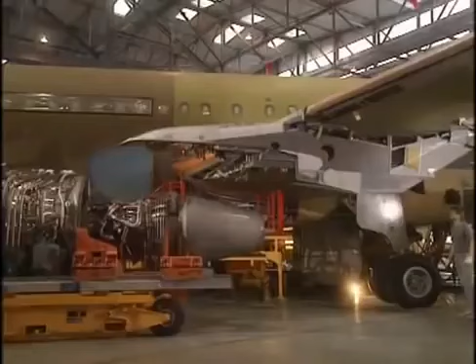The Airbus company, an international alliance of many aviation companies, came into being in the early 1970s and has grown steadily in stature until now, when most of the world's airlines fly some of the Airbus range of aircraft. There has been a design genesis that has encompassed short-haul, mid-range and long-haul solutions, and some notable variants. We investigate just how this success story has come to pass by focusing on the planes that are Airbus.

As soon as Wilbur and Orville Wright had landed and retrieved their craft at Kitty Hawk in the USA in the early part of the last century, the next questions were raised. Higher, further, faster, better. They had begun a chain of events that would change the world. There was a dramatic increase in the number and types of flying machines. Some weird, some wonderful, but all exploring ways of getting men into the air in a powered and controlled manner.

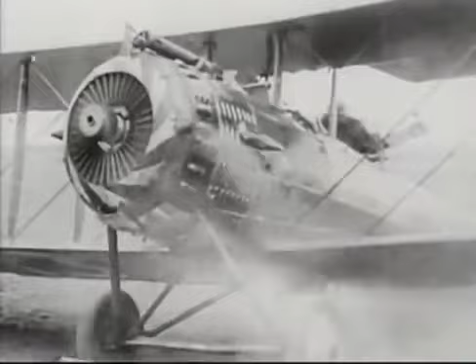Power and control were the main issues, and once the basic elements of taking off and landing had been mastered, the aspect of control became the next obstacle to aircraft development. World War I saw a rapid increase in technology as the warring nations sought to harness the advantage of powered flight. Britain, France, Germany and the USA formed their own Air Corps and produced relatively robust, efficient fighting machines. The wood, string, levers, wire and cloth had become lethal weapons in their own right.

The first transatlantic crossing in 1919 by the intrepid Englishmen Alcock and Brown in their slightly modified Vickers Vimy bomber aircraft caught the eye of the general public. Aircraft became fashionable and exhilarating fancies for those who could afford and dare to fly them, and air travel became a viable prospect.

Aircraft that could carry a reasonable number of people as well as mail began to emerge, and with them blossomed the airline industry. To travel further with more people, bigger aircraft with more engines were built. The open cockpit, wood, stick and wire, giving way to aluminium, glass and complex controls. Airline comfort and elegance reached its peak with the huge seaplanes, setting more and more records for distance and comfort, relying on the water for their takeoff and landing.

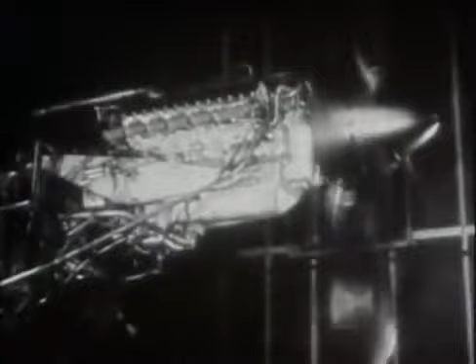Civil aviation came to a sudden halt when World War II erupted. All focus was on the production of military machines, especially fighters and bombers. It was the accelerating development of the bomber with its need to carry a large payload over a long distance that formed the basis of design work for the new era of civil passenger aviation. But the jet fighters of the Luftwaffe and the RAF ushered in a new era of flying.

Germany, France and England were almost bankrupt at the end of the conflict. Civil aviation was too much of a luxury, and European airlines initially had to make do with wartime aircraft. The manufacturing might of America had not suffered so badly, and so America was able to stake an early lead in the race to dominate the skies. Companies such as Boeing quickly used multi-engine propeller aircraft on internal flights, and the all-important transatlantic route became the key to large airline progress.

European companies concentrated on smaller routes on the continent until the arrival of the de Havilland Comet in the early 1950s, the first jet airliner in commercial service. In quick succession, the aircraft companies of Britain, France, Germany and Europe began building short-haul jets that proved economical, comfortable, reliable and efficient.

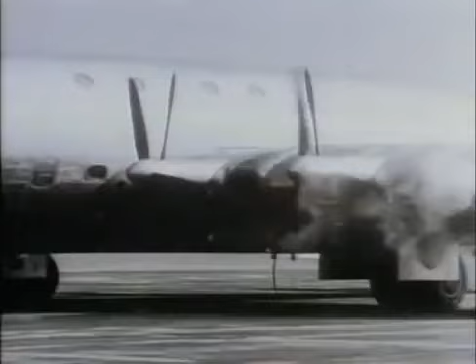Britain and France had been building their own aircraft types for some time. The BAC 111 was a typical British design. The unusual Hawker Siddeley Trident trijet and the sleek French Caravelle enjoyed some success with small European airlines and provided excellent jet airliner experience. But people were beginning to want to travel further, and it was the long-haul expansion that was evident, and that belonged almost solely to the Americans.

In the mid-1960s, the EEC slowly came into being as European nation after nation signed up to the common market. The British and French governments recognized that working together could give better results, pooling ideas, technology and expertise towards a common goal. Instead of trying to go bigger than the Americans, then why not go faster across the Atlantic? Enter Concorde, the world's first supersonic airliner. The Anglo-French creation was a technological masterpiece. Flying east to west across the Atlantic, you could actually land in New York 1 hour before you set off.

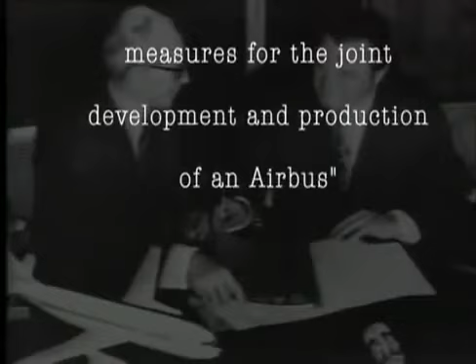In 1967, French, German and British governments announced plans to build a European aircraft. The aim was also to challenge the Americans. However, a combination of politics, the economic legacy of Concorde, and the costly TSR-2 fiasco meant that 18 months later, the British government withdrew support.

Hawker-Siddeley Aviation rather bravely funded the building and design of the wings themselves for the new Airbus, until the company was merged with BAC to become part of British Aerospace in 1977.

At the Paris Air Show in May 1969, the A300B, the world's first twin-engine wide-body jet, is launched. It is to carry up to 250 passengers in a comfortable two-class layout, and later that year, Airbus secures its first potential order for 6 A300B2s, with a letter of intent from Air France.

December of the same year saw the Airbus Industrie GIE officially formed between Aerospatiale for France and a grouping of Germany's leading aircraft and manufacturing firms, later part of Deutsche Aerospace, with VFW Fokker of Holland and Hawker-Siddeley of Britain becoming associate partners.

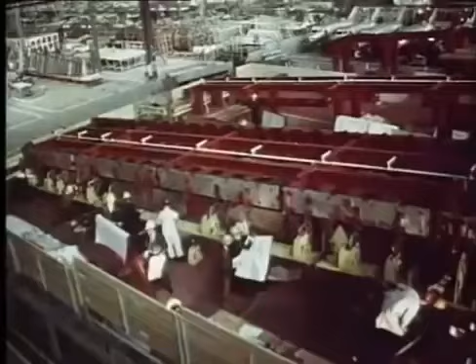Airbus Industrie was to provide a single sales, marketing and support network for Airbus customers. For the first time, not only was a brand new aircraft about to be produced, a brand new company and business concept too was to emerge, spanning many nations, languages, customs and expertise.

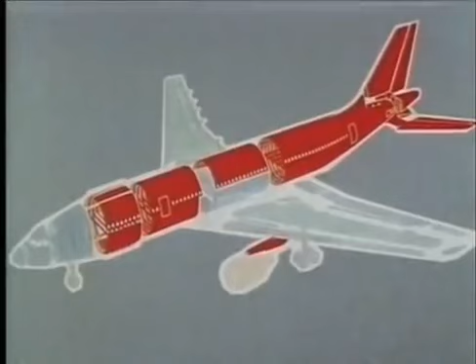The allocation of building sections of the aircraft was closely scrutinised and based on existing skills in national companies. Deutsche Airbus near Hamburg had responsibility for the main fuselage. Hawker Siddeley in Britain began work on the wings. Aerospatiale in France were the main assembly point in Toulouse, with the cockpit and centre section being produced at Saint-Nazaire. A few years later, the Spanish company CASA would come on board to build the tailplanes in Madrid.

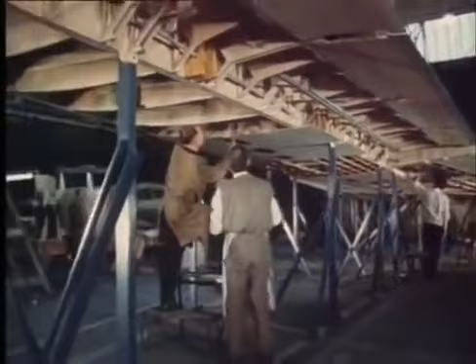In the late 60s and 70s, it must be remembered that there was not the technology available to today's designers. Wooden mock-ups were still made of the wings by Hawker Siddeley. Computer simulation, or CAD, was still a dream. Feet and inches, pounds and stones still vied with millimetres, kilograms and kilometres.

Today, a designer can email or video conference immediately with a colleague in Toulouse or Holland. Information, queries and ideas can be shared instantaneously via the internet. Back in the late 60s and 70s, the slide rule was king, and the experience gained from the early jets and Concorde production became invaluable.

Testing was generally done to destruction to ascertain stress capabilities, even simulating a bird strike using a special air cannon. And as none of the companies had successfully produced a wide-body jet airliner before, the risks were enormous.

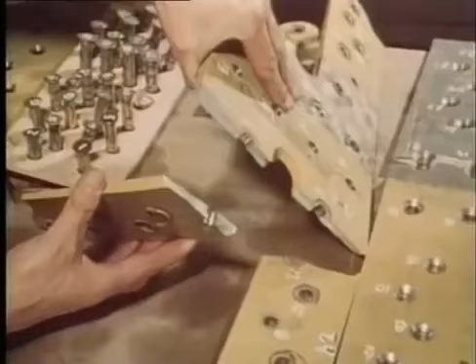It wasn't just the technology that was needed to make this project happen. The people and expertise, both on the technical and management side, were equally as important. To successfully combine the skills, ideas, fears and strengths of several nations, companies required great tact, diplomacy and clarity of vision.

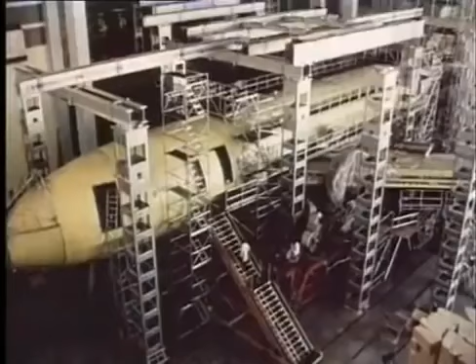In a series of groundbreaking moves with parallel moments of uncertainty and optimism, the first A300 began to take shape. It was the first wide-body jet of its type ever, and the first airliner ever to be built by several nations at once.

Immediately, there were difficulties. The first choice engine, the Rolls-Royce RB211, was dropped after Rolls sold the design to the American TriStar jet and lost interest in the Airbus project. In a remarkable yet pragmatic turnaround, Airbus arranged to test the American-built General Electric CF6 engine on a B-52, found it to be remarkably fuel-efficient and powerful, and incorporated it into the design.

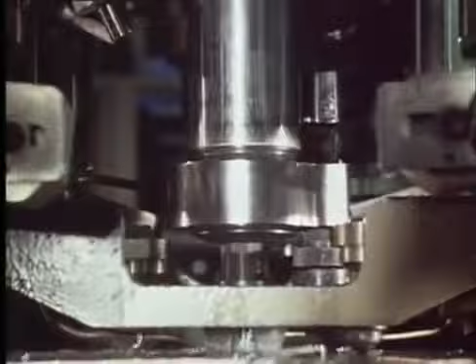The engines were further tested at extreme temperatures and conditions designed to highlight any possible flaws. The spirit of cooperation and dedication to the cause pushed Hawker Siddeley to introduce expensive new digital tooling machines, crude by today's standards, but at the time revolutionary and symbolic of the highly technical and energetic approach to the project. Wings were built in vertical jigs, with the leading and trailing edges fitted separately.

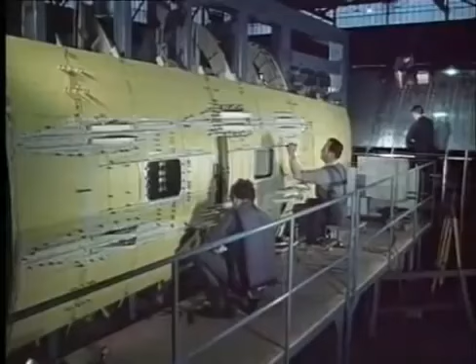Airbus pioneered the use of advanced composite materials on the A300B, and CASA in Spain began incorporating them in secondary structures such as tail fins and leading edges. Deutsche Airbus produced the central fuselage in huge jigs, again with little computerized technology, a testament to the skill and engineering expertise of all involved. A full sense of European cooperation was beginning to emerge, and there was a certain pride in being part of a new special international community.

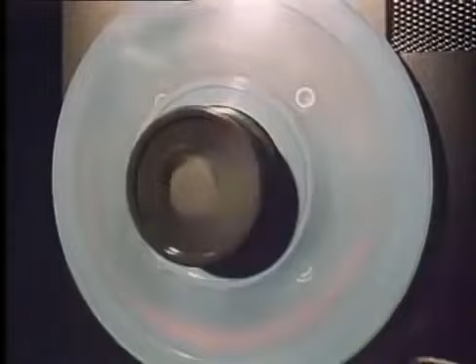The sites were widespread. Hawker in Chester, England, Deutsche Airbus in Hamburg, Germany, Aerospatiale in Saint-Nazaire, northwestern France and Nantes, and of course the final Airbus assembly plant in Toulouse, southwestern France.

Designing the separate sections and building them was one thing. Getting them to Toulouse for the final assembly was another. With their first aircraft in several pieces and a letter of intent from Air France for 6 A300B2s, there was no time to spare. Obviously, air transport was needed to carry the sections to and from the various sites, and initial procurement made, but no one could wait for an aerial transporter to be built or adapted. So road transport and ferries were used.

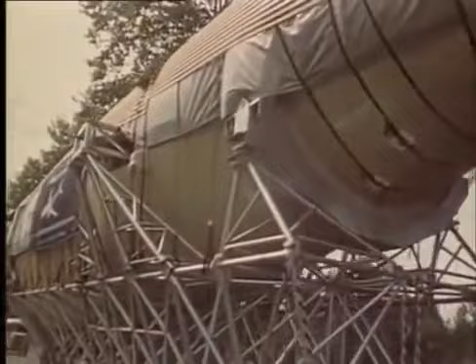The huge loads caused a lot of excitement and chaos on the road, as phone lines, power lines and trees were always an obstacle. But the sections had to get through to the plant for assembly. Many people watching the spectacle did not comprehend that they were seeing the unification of a pan-European project, as the huge loads gently nudged their way through villages and towns day and night. This is still the case even today on routes to and from the airports.

Conscious of the need for speed in 1972, and again with remarkable boldness, to improve the transportation process, Airbus bought and modified an American Boeing Stratocruiser, followed quickly by 3 more. In 1972, these 4 Super Guppies began commuting between the Airbus plants. The transporters were powered by 4 Allison 501 propeller turbines, derived from the Boeing model B377 and also used in the NASA spaceflight programs.

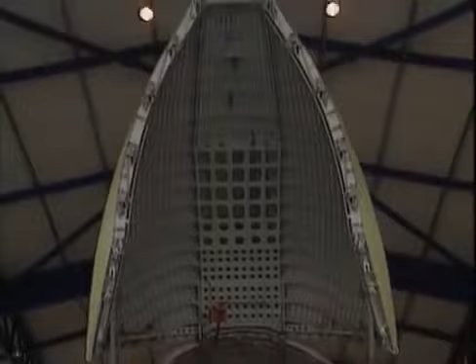As Airbus Industrie grew with rising production rates, the Guppies eventually arrived at the limit of their capacity and age. So, Deutsche Airbus and Aerospatiale formed a Special Aircraft Transport International Company, SATIC, in October 1991, and began to develop one of their own aircraft to become the new supertransporter. This arcane but practical transportation got the parts of the first Airbus A300 to the Toulouse plant, and work began on assembling them immediately.

1972 was a busy year for Airbus on many fronts. True to its original concept, Airbus Industrie was not just building aircraft, it was selling them too. Mock-ups of the interiors were made to show prospective customers what could be done with this wide-bodied airliner. Training of pilots began in earnest with the A300 simulator, setting in motion the practice of allowing pilots to cross-train from type to type with less difficulty and introducing the early concept of commonality.

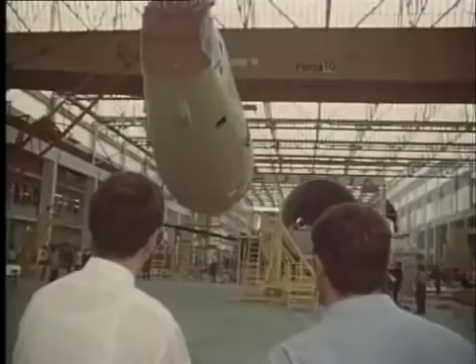A short time after assembly began, Air France officially became Airbus's first customer, placing a firm order for 6 A300B2s, a 270-seat stretch version of the original A300B they originally requested. This order was followed sometime later by Spain's Iberia Airlines. In January 1972, the Spanish company CASA is officially awarded the contract to build the horizontal tail parts of the aircraft and joins the consortium, taking a 4.2% stake and developing the use of weight-saving new composite materials.

As production of the A300 continued apace, the A300B4, a longer-range version of the A300, was launched, with a range of 3,000 nautical miles compared to the 1,200 nautical miles of the original A300. Its maximum takeoff weight at 165 tons is also greater than that of the A300B2. As well as the introduction of the composite sections of the aircraft's fin, leading and trailing edges and radome, the A300 also featured advanced rear-loaded aerofoil, giving a greater aerodynamic efficiency of the wing, and full flight regime auto-throttle and automatic wind shear protection, putting it well ahead of its competitors.

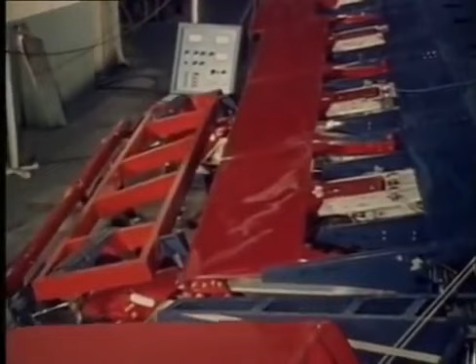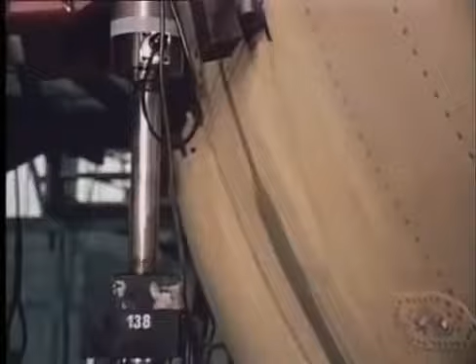The rollout was performed jointly with the appearance of Concorde Mark II. A300 was the airline industry's first twin-engine wide-bodied aircraft, and it soon began to be noticed. Detailed testing of all areas followed. The cabin resistance to air pressure was calibrated. Foam blocks were used to reduce the volume of interior space, so less air is needed and a more accurate result obtained. In these pre-computer design days, hydraulic rams were used to simulate and exceed the stresses that could be imposed upon the airframe. Early punch code computers recorded the data.

The A300's maiden flight took place on October the 28th, a month ahead of schedule, despite several delays due to bad weather. The flight crew of Captain Max Fischl, Bernard Ziegler, Gunther Scherer, Pierre Canel and Romeo Zinzoni nervously began pre-flight checks. The A300, the first Airbus aircraft and first wide-body twin-engine jetliner, took off at 10:30 a.m. local time from Toulouse Airport for a mission lasting for 1 hour and 23 minutes. A thorough in-flight check of all systems was undertaken, both on board the aircraft and from the supporting teams.

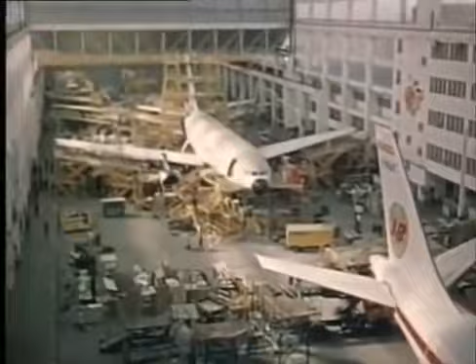Landing was greeted with relief and exhilaration. The flight crew were delighted with the aircraft's performance. Much of 1973 was given over to flight testing and evaluation, and the production line began to expand. In March 1974, the A300B2 received certification from French and German aviation authorities, ahead of schedule and on budget, which meant it could be delivered to its new owners.

Air France took delivery on the 10th of May, entering the A300B2 into service on the 23rd by flying from Paris to London. The aircraft now began a whistle-stop sales tour of the world's possible clients, landing and taking off at major airports and air shows around the globe, especially North and South America. Nothing sells an aircraft like the aircraft itself, and the orders start to roll in as the Airbus story accelerates.

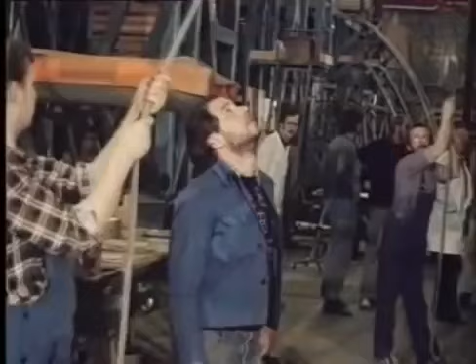As the product range was developing, taking on board new technical innovations and adapting to more markets and customer demand, so the company itself was developing. The British air industry in the late 1970s underwent a major shake-up, and after several mergers and acquisitions, including the takeover of Hawker Siddeley, British Aerospace was formed and joined Airbus Industrie in 1979 as a full partner, taking a 20% share, raising the profile and capability of the European venture and firmly uniting Europe's leading aircraft manufacturers. Just prior to this, the smaller but longer-range A310 was launched, with even more technological advances. With the A300-600 and A310, Airbus first develops the concept of commonality.

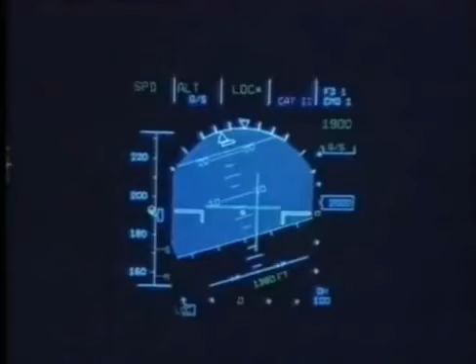This meant that for the first time, a twin-aisle aircraft could be piloted by a two-man crew, using instruments located in front and above, without the need for a third crew member, usually referred to as the flight engineer. The introduction of cathode ray tubes, or CRTs, was also a revolutionary innovation. The old dials and needles were soon to become a thing of the past. Airlines around the world began placing orders for this aircraft, from Saudi Arabia to American Airlines. Airbus established its presence worldwide and as a world leader.

The aircraft industry has its own idiosyncrasies. Large freight carriers such as FedEx, UPS, DHL, TNT and others were looking for a freighter, and they selected the 222-inch fuselage cross-section for the original A300B jetliner. This sizing not only created one of the most comfortable passenger cabins ever designed, it also provided spacious lower deck holds, capable of accommodating the industry-standard LD3 containers side by side, or standard pallets, as well as a voluminous main deck with excellent cargo capacity.

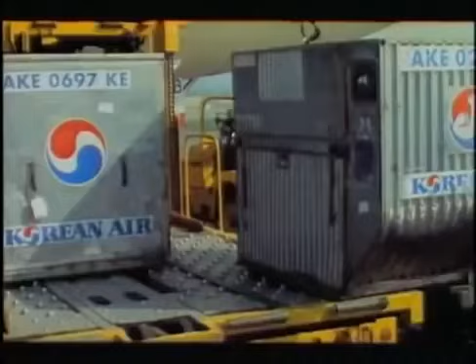An A300B4 configured as a freighter has a 43 metric ton cargo capacity at a range of over 2,000 nautical miles, 3,700 kilometers. And 1978 sees the launch of the convertible A300B4 passenger cargo aircraft, aimed at the developing Middle and Far Eastern countries. These additional markets were to prove useful to Airbus Industrie as the passenger markets fluctuated in their buying cycles.

The A310, seating 218 passengers, aims to offer airlines a smaller, longer-range alternative to the A300. Its launch shows Airbus to be more than a one-aircraft manufacturer. The commonality factor means that essential parts, sections, procedures and training can be shared by aircrew and ground crew, not only saving on initial cost, but also increasing enormously the after-sales support and service offered by the company in all parts of the world. Airbus again went up a gear in the eyes of the world's major airlines.

In 1981, the first A310-200 rolls off the final assembly line in Toulouse, almost 10 years after the rollout of the first Airbus aircraft, the A300B. Only 6 computers are needed to run the aircraft's autopilot, autothrust and flight director, as opposed to the 18 computers required on the A300B2 and A300B4, which used analog technology.

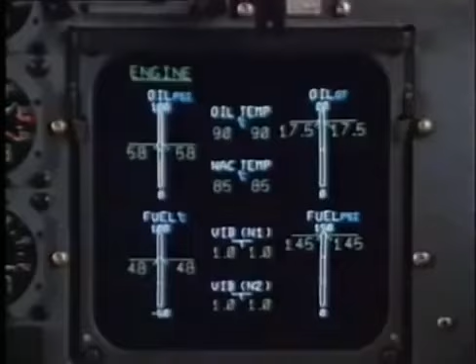The A310-200 entered service with Swissair in April 1983, and almost immediately the go-ahead is given for the A310-300, which again incorporated new innovations, such as using composites in primary structures like the fin, and becoming the first civil aircraft to feature the drag-reducing wingtip extensions.

Within the family structure, the longer-range A300-600R has been developed, giving longer range and aimed at a definite market, the Americans. From the early, heady days of optimistic dreams and challenging political and technical reality, the team at Airbus has ushered in a new era of aircraft, broken into new and bigger markets, and proved themselves capable of taking their place at the leading edge of aircraft design, manufacture, production and delivery. And the story is only just beginning.

Having begun to establish itself as a world player, Airbus looked at the medium-haul range in different areas of the world. And to replace the aging global fleet of existing aircraft, they set about designing the A320 family of twin-engined, single-aisle jets.

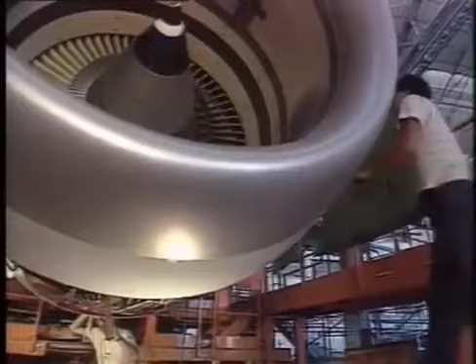In Toulouse 1986, the A320 began to take shape, the parts, as before, arriving from different European countries. CASA in Spain increasing the use of composites in the tail section. The engines chosen for this smaller jet were the SNECMA GE CFM56 turbofan and International Aero Engines V2500. Section by section, the plane was assembled and tested on the ground. Resting on its own undercarriage is just one of the major steps for a new airliner.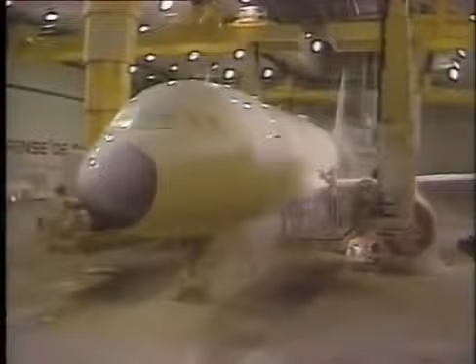Prior to painting or public rollout and first flight, the aircraft is fitted with engines of the same weight to aid structural testing. These will be changed for the CFM56s later in December of this year. The maiden flight takes place early next year, February 1987. Europe's Airbus 320, the third airliner of the range so far, is about to take to the skies for the first time.

Past success with the A300 and 310 aircraft, and Airbus's reputation, mean that orders for the new jet are already accumulating. The highest ever figure of orders placed, 600 so far, before the aircraft completes its commercial certification program. Happily, the maiden flight is completed without any major problems, and certification and marketing begin. The earlier work on the A300 testbed accelerates the testing, as does the use of advanced technology on the ground and the air to process results.

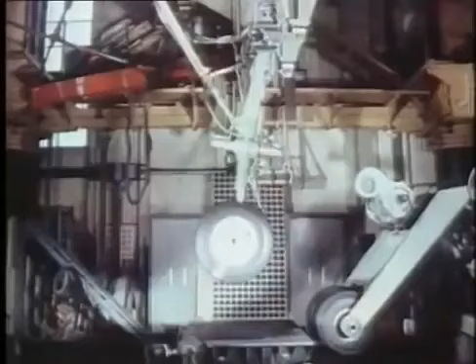One of the more dramatic tests involves the skid rail and rear fuselage testing, as well as repeat heavy landings and takeoffs with the undercarriage. Even the earlier air cannon is used to simulate bird strikes against the windshield, and the engines also undergo stringent testing with foreign objects.

One important aspect of the A320 testing involves monitoring the crew for stress and behaviour patterns with the new technologies. All these and more tests are thoroughly applied, and finally the aircraft receives its certification.

Rollout of a new aircraft is a very prestigious affair, akin to the launching of the great ocean liners of the past, especially when Airbus is the symbol of European cooperation and technical expertise. Dignitaries from all over Europe and the world's media welcomed the dramatic rollout of the A320.

With the order books filling up and airlines from many nations taking up the short to medium haul aircraft, production went into top gear. The various companies from around Europe producing the respective parts, transporting them with the supertransporter and assembling them in Toulouse. The technical innovations of this aircraft allowed it to be flown easily and efficiently on many routes, expanding air travel even further.

Production of the A320 rose to 10 aircraft per month as the world's airlines began to exploit the emerging short-haul market, competing directly with road and rail transport. Once the air industry's underdog, the fortunes of Airbus were improving dramatically. The A320 was the first civilian airliner to introduce fly-by-wire technology, a massive step forward in control and safety in the air.

In the early years of flight, sheer muscle power was all that was needed to operate the stick that controlled the aircraft surfaces. As aircraft grew larger, the control surfaces became bigger, and forces generated were too great for mere muscle. Some ingenious designs were incorporated to help this. One of the earliest steps to assisted flight control was with the flying boats. The wheels and pulleys involved became quite common in many aircraft of the time to deal with the sheer muscle power needed to maneuver these craft.

Some seaplanes began to use electrical servo assistance for the control surfaces. With bigger aircraft and the civil aviation expansion in the 1950s, more control was needed. The Princess used electric servos to operate the different surfaces. Without these, she would not be capable of maintaining any flight stability or control. Soon, nearly all aircraft were using servos of one kind or another to operate the flaps, rudders and tail areas. These surfaces were, however, still linked to a complicated matrix of mechanical levers, rods and hydraulic motors activated by electrical signals.

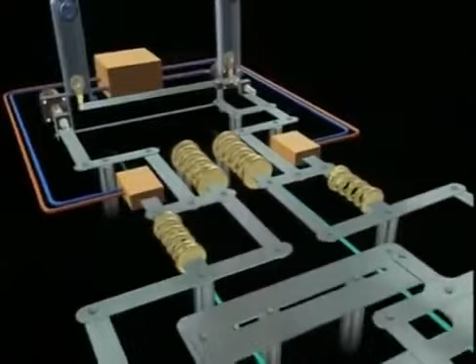The next logical step was to link the motors that moved the control surfaces to the cockpit by electrical wire. This was much simpler, lighter and safer. This also meant that the traditional columns or control yokes could be replaced by smaller side sticks. This revolutionary leap forward, along with the new display systems and forward-facing cabin, made the A320 the most technologically advanced airliner of its time. I love flying fly-by-wire aeroplanes. William Wainwright, chief test pilot at the time for Airbus, takes us through some of the features of fly-by-wire.

Now we have electric signalling. I'm back to my small side stick, which I move with my fingertips, just like that. That moves the aeroplane. To illustrate what I mean about going to maximum performance easily, let's just slow down to our so-called alpha max, which is just before the stall. First of all, I need to reduce the engine thrust. Then the aeroplane slows down, but still with quite light forces.

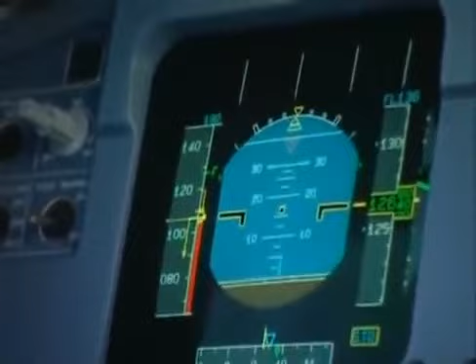I pull the stick fully back, and I keep pulling it back. There we are. It's going back towards 100 knots. And all I'm doing is holding the stick fully back, and the aeroplane will stabilize just above the stall. Feel it's buffeting a little bit. That shows that we're not very far away from the stall, but we won't stall. We can sit there all day.

Safety is obviously of paramount importance, and in order to ensure that there are no technical failures with these systems, 5 separate computers are used in the control system, each individually capable of assisting the pilot, and to provide even greater redundancy insurance, each computer is comprised of 2 units, one monitoring the other. To provide an additional level of security, the computers are designed and built by different manufacturers and programmed by different software teams, so that any unforeseen technical faults will not affect all the computers on board.

They also have a direct benefit to the human element of flight. They help me by making the aeroplane much more pleasant to fly. They smooth out all the nasty characteristics that some aeroplanes have, like big trim changes with speed or weight, changes in pitching moments with applications of thrust. That can all be taken out by these computers.

The computer systems also introduce the benefits of commonality in the Airbus family, making the aircraft very similar to fly. There are also several benefits to airline companies with this kind of technology. This commonality of flight systems was also applied to the airframe, and the adaptability of the A320 is evident in later models.

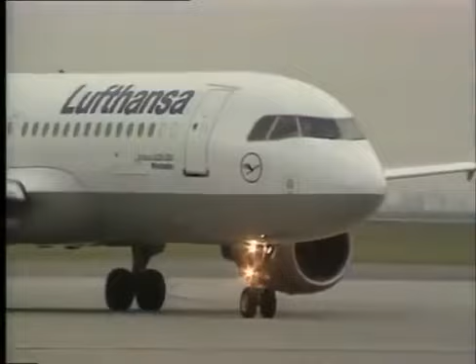The A320 was the first single-aisle airliner to feature a wide fuselage, offering more comfort to passengers in the cabin, with wider seats and a wider aisle. Furthermore, the superior cabin size and shape allowed large overhead storage to be fitted for faster boarding and deplaning, as well as greater convenience. The A321 seats 185 passengers and has a range of just under 4,500 kilometers.

It was launched in November 1989 and flew for the first time in Hamburg in March 1993, where it is to be manufactured. Longer and carrying more passengers farther, the A321 was ideally suited to the medium haul runs, both in Europe and the USA. Because it also uses the same cockpit, flight systems, engine and cabin as the established A320, airlines also receive better parts and backup service.

May 1993 also saw Airbus launch another member of the A320 family, the A319, a smaller version of the A320, seating 124 passengers. Again, sharing commonality with the A320 and A321 enabled all 3 aircraft to be operated effectively as a single type, leading to significant savings for airlines. Further savings are obtained through cross-crew qualifications with the A330 and A340.

The Airbus family and production capacity continued to grow. And on August 25, 1995, as it completes its successful maiden flight, only one day after its rollout, Airbus announces that it has firm advance orders for 81 A319s, orders for 905 aircraft from 43 customers for the A319, 320 and 321 family.

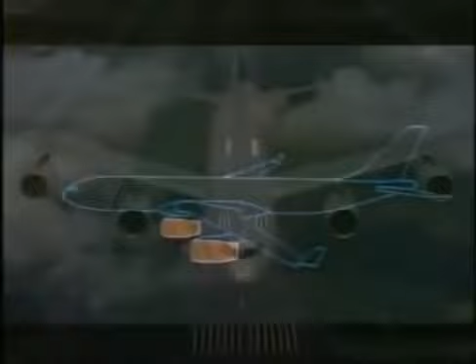The new family of A330s and A340s were aimed at the medium to long haul and also the very long haul market. The common use of fuselage, cockpit and main wing meant that Airbus could cut development costs and time. Customers could also achieve greater reliability, efficiency and service. Savings were made in spares, training and maintenance, as well as operating costs.

The main difference between the types was based on the number of engines, and at the time of launching these models, much technical research was conducted to achieve maximum efficiency in this market, explained here by one of the early design engineers.

We'll start with a common airframe featuring a twin-aisle fuselage seating 300 passengers and dimensionally identical wings and tail surfaces. And we'll look at the three configurations currently offered to airlines: the twin, the quad, and the tri-jet. Extra weight at the back there, both due to the engine itself and the need to strengthen the rear fuselage to carry it. So to redress the balance, the wing must be placed further aft.

Now, the length of the moment arm and the dimensions of the tail surfaces are directly linked. If the moment arm is shortened, it'll reduce the tail's efficiency. To compensate, we need either bigger, draggier tail surfaces or a complex full-time longitudinal stability augmentation system. So Airbus concentrated on two designs, the twin-engined wide-body A330 and the four-engined wide-body A340.

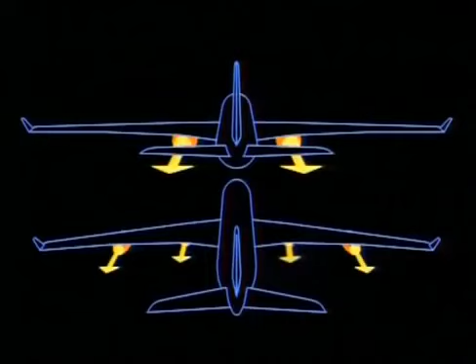If four engines are reduced to two, the two will need to be larger, much larger in the case of the twin designed for very long ranges. Why? Because the extremely heavy load carried calls not only for high power, but for very high reserve power to meet the single engine out requirement. In a twin, an engine failure results in a 50% power loss. And for the long-range twin, this must be offset by very high thrust indeed, on one side only.

The quad is much less affected, with one engine representing only 25% of the installed thrust, and the reserve power is more evenly distributed. The imbalance that both aircraft now suffer must be compensated for by the rudder. The long-range twin rudder has a much more demanding task and must be made bigger, and the consequence? Higher drag in the cruise.

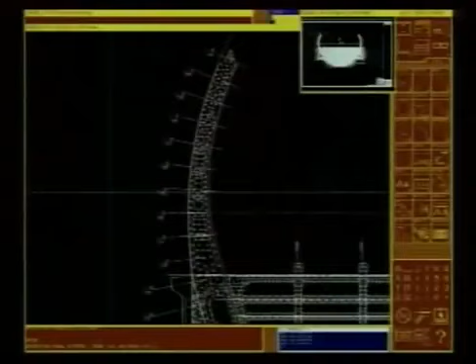Research and development to match potential customer requirements was begun as early as 1987. And as a testament to Airbus's information flow, input was also included from airlines' own representatives. The increasing use of better computer design systems and electronic communications built on the earlier technological advances and helped enormously in decreasing testing time and refining production methods. The very early methods of wooden mock-ups, cabin interior construction and expensive wind tunnel tests began to look very dated.

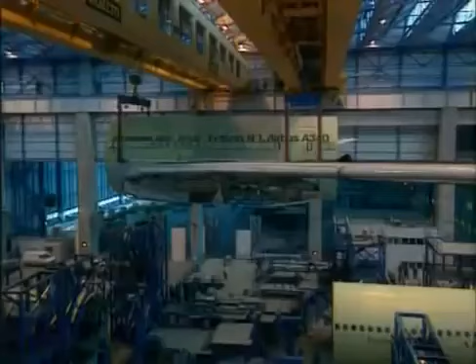To house such a large enterprise, another production facility was commissioned and additional investment raised for the next stage of the Airbus expansion. The main production area for the 330-340 at Toulouse became the largest single-span building in Europe. Called Clément Ader, after the French aviation pioneer who invented the word avion, this massive building heralded the next expansion phase of Airbus Industrie. The production techniques were developing, as was the partner base.

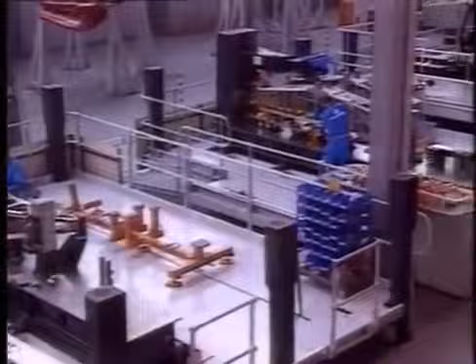Now using a modular assembly process instead of the traditional production line, parts of the Airbus can be assembled in different hangars and fitted together at specific production points. The influence of new technology is evident as robots and computers are now heavily used in the design process, cutting and assembly. British Aerospace at Chester builds the wings for the A330-340 program, although final assembly is now done by Deutsche Airbus in Germany.

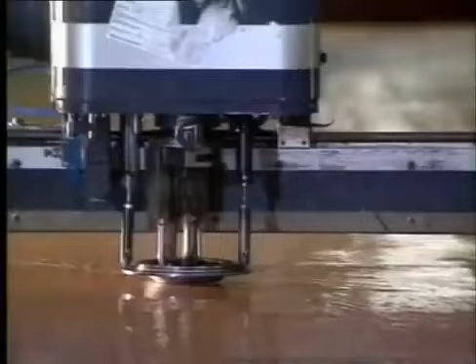Deutsche Airbus, as part of the Deutsche Aerospace, assemble fuselages in Bremen and Hamburg, as well as assembling the A321. Aerospatiale also produced several sub-assemblies such as cockpits and central sections, as well as final aircraft assembly in Toulouse. CASA in Spain have increased their workload, especially with their high-tech composite parts.

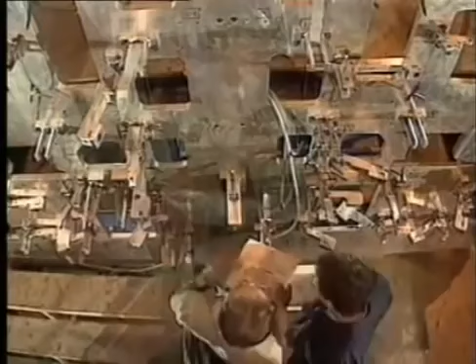But Airbus has also expanded its partner base to include wider international partners, such as Belairbus, who produce these honeycomb parts. Canadair in Montreal and even Australian companies are now important subcontractors to British Aerospace and the Airbus program. Even as far afield as South Korea, parts are made for Airbus.

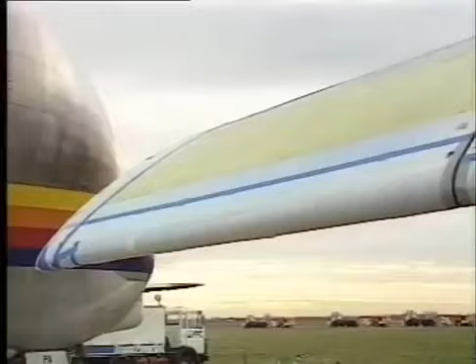There are several engine types for the A330-340 program. CFM56-5Cs are for the A340, while the A330 has a range of engine choices: CF6-80E1s, Pratt & Whitney 4000s and Rolls-Royce Trent 700s. The scale of production meant that the Super Guppy fleet was still employed to ferry parts around Europe. But on the intercontinental routes, the Soviet-built Antonov was used to carry sub-assemblies. Again, trucks were used for shorter sections.

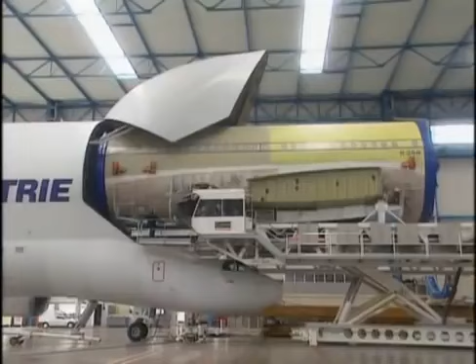The Super Transporter came into service and was in constant use, ferrying sections of the new aircraft around Europe, from manufacturing centres to assembly plants in Toulouse, Nantes and Saint-Nazaire. The A340 was the first four-engined long-range aircraft to be developed in 25 years, and production of this aircraft and the whole Airbus Corporation now stepped up a gear. This speeded-up film shows some of the processes involved as the aircraft is assembled prior to rollout and testing.

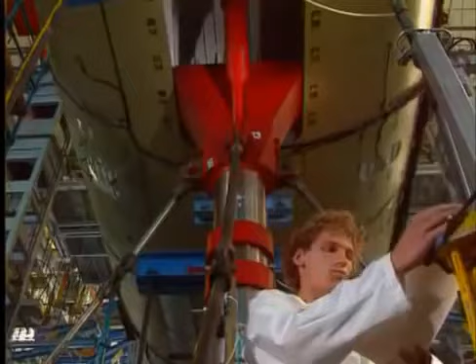Structural testing of fuselage, wings and other main parts is carried out on the ground at various points in construction. The aircraft frame is subjected to extreme physical stresses. The stretching, compressing and bending is designed to test the construction beyond any limits it may encounter in flight. Its wings are bent to incredible angles until they finally break.

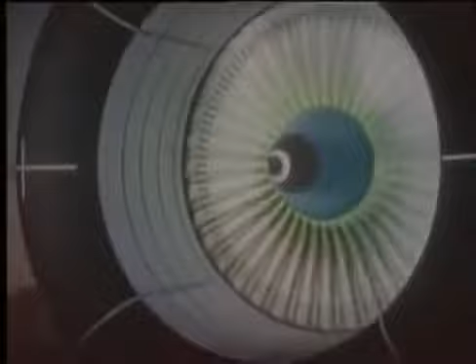After testing on the surfaces, the aircraft is rolled into the next hangar. The engines are added and more testing done on the frame, hydraulics and engines. These engines have to endure bird strikes, excessive water and ice.

All of the new components and features, such as the increasing use of composite materials, have to demonstrate their individual capability and are monitored not only by the Civil Aviation Authority, but by Airbus engineers, so that future models can benefit from the accumulated data. Only after these tests have been passed and full accreditation given to the results can the aircraft be rolled out for its first flight.

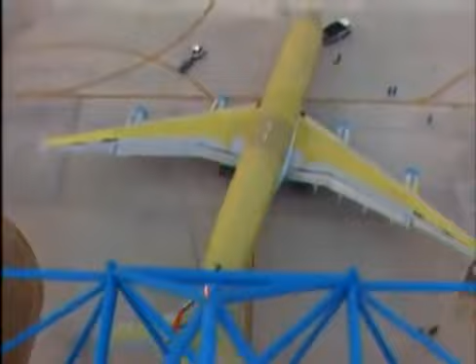Airbus 340 No. 1 was given her ground roll clearance in April 1991. More tests were conducted, and after full verification she was given her new paint job before the public launch later that year. Once again, the media and marketing departments got behind the launch of a new Airbus. The A340 was launched to the public in great style, sending a clear message to the airlines of the world that Airbus was up there with the long-haul big boys and here to stay.

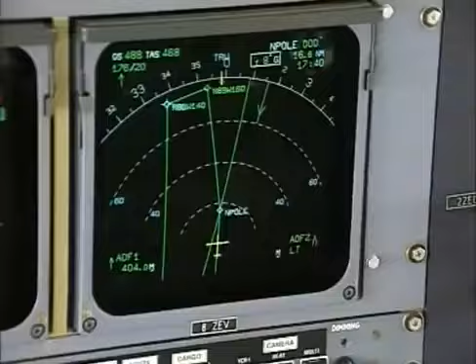Autumn 1991, and it's time to see if the engineers, designers and test teams have got it right. On October the 24th, 1991, all doubts were dispelled as the 255 tons of the A340-300 took off and successfully completed all of her inaugural in-flight tests. To increase range, the wings had been reinforced to carry more fuel and improved aerodynamically to cope with the increased takeoff weight.

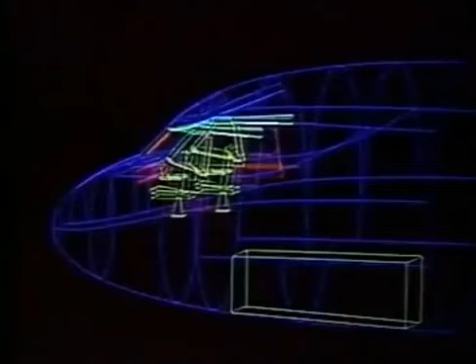The world had changed since Airbus began their story with the A300. Routes had become longer, more concern raised about the environmental impact. Operating costs had increased. Cheap budget airlines had made airline travel more popular. Airways and airports became more crowded, and the prize market of the very long-haul routes became a delicate balance of expectations and viability. With visionary boldness and pragmatic research, a new, bigger family of aircraft was conceived by Airbus Industrie.

The company had grown exponentially, and the infrastructure, skills and experience was in place. Was the market ready for the A380? Extensive research was conducted at many levels, including the average passenger's ideal requirements, airlines' preferences, existing airport capability, the competition, and a wide range of wider issues, intended to explore all the factors affecting such a huge investment. This flagship of the 21st century was designed to be produced with the very latest in technologies, materials, systems, and industrial processes.

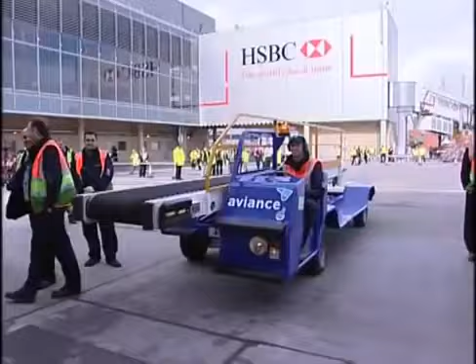Early critics of the A380 design were pessimistic about where and how the aircraft could be operated from. Airports have an established infrastructure, and expansion or adaptation of these could be a very expensive and potentially insurmountable hurdle. But from the conception of the A380 program, Airbus consulted with airport and aviation authorities and regulatory bodies to come up with the best possible design and performance characteristics to match their needs. The A380 was designed to meet the space and logistical restrictions imposed on airports today in an ever more regulated environment.

Airports are already scheduling into their development plans billions of dollars worth of infrastructure improvements. The A380 is an asset to these plans. Its greater capacity reduces the need for airports to duplicate existing facilities to cope with the rise in demand.

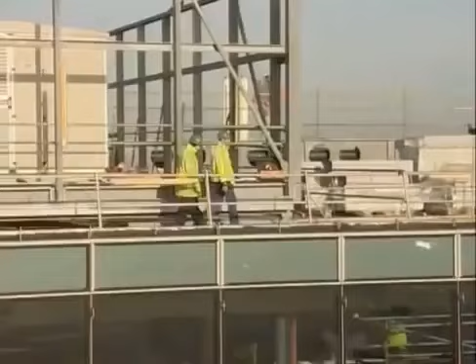If the opening ceremony was spectacular and the plane impressive, then the work being done elsewhere is truly amazing. Working just meters from one of the world's busiest runways and in the middle of a live airfield, engineers at Heathrow are working on a massive project to receive the new A380. Its wingspan is 15 meters or 50 feet longer than the biggest jumbos currently in service, and that's meant a complete rebuild of terminals for British Airports Authority in a race against time.

We're absolutely on schedule. Behind me is the new pier in Terminal 3. It will house 4 A380 aircraft stands and the gate rooms for the 500 or so passengers on each aircraft. This time next year this will be fully complete and we'll be ready for the first aircraft at Heathrow.

The piers to get passengers off not only need to be further apart, but 2-story to accommodate the double-decker Airbus. Parts of the runway and taxiways are having to be strengthened and widened, and with a capacity for more than 800 passengers, huge new baggage halls with long conveyor belts are being constructed. In total, BAA is spending £450 million to prepare for the arrival of the new craft.

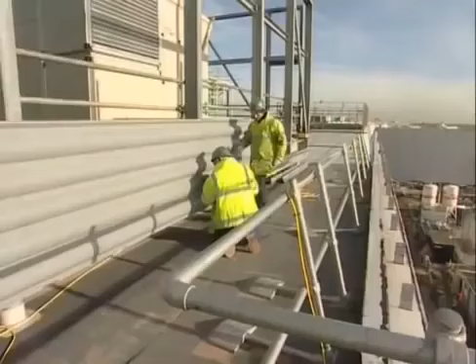It's predicting that in 12 years' time, the A380 will account for 1 in 8 flights, and with landing slots at Heathrow full, it's seen as the only way of increasing passenger numbers. This is an aircraft built for Heathrow. There's no two ways about it. We're going to see, I reckon, probably half the A380 operations in the world will be initially coming in and out of London Heathrow. Virgin has ordered 6 of the craft, but at the launch in France yesterday, the airline still had concerns that other airports had been slow to follow Heathrow's lead.

Boarding the A380 will take no longer than existing large aircraft, and servicing the A380 will have minimal impact on current facilities, because its main deck lower doors and its ground service connection points are at a similar height to those of existing large aircraft.

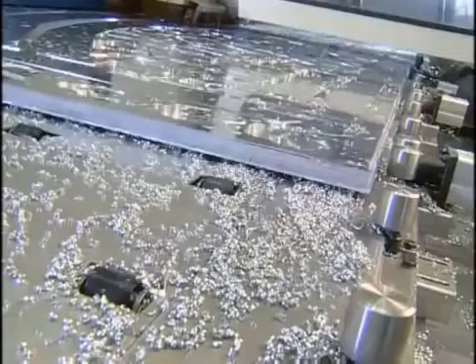The environmental issues have also been addressed by Airbus. The A380 was designed with the stringent noise and pollution controls of modern airports in mind, and its environmental friendliness goes beyond noise reductions. Its extensive use of composites, a greater proportion than in any other aircraft, means reduced weight and therefore lower fuel consumption, around 12% lower than that of its nearest competitor.

Indeed, the A380 will be the first long-haul aircraft to consume less than 3 litres of fuel per passenger over 100 kilometres, a rate comparable to an economical family car. Less fuel burn results in fewer emissions of gases into the atmosphere. Better aerodynamics and advanced technology means the A380 will be significantly quieter than other large aircraft, producing half the noise of its closest rival.

Look, the main thing that airports are going to need is to ensure that their runways and taxiways are strong enough to withstand the extra weight that's being carried on this aircraft, that they've got equipment to be able to unload baggage and load baggage, that the departure halls and arrival halls are able to cater for a larger number of people, that the baggage belts where people collect their baggage from at the end of the flight are able to carry maybe 20 or 30% more baggage because of the number of passengers that are on the aircraft.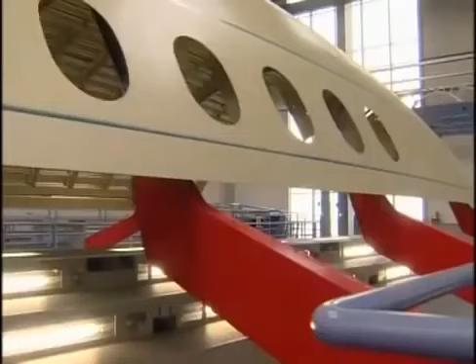The A380 family starts from a baseline passenger aircraft with a capacity of 555 passengers in 3 classes and a range of up to 15,000 kilometres, 8,000 nautical miles. It has an overall length of 73 metres and a massive wingspan of 79.8 metres. The double-deck fuselage is 7.14 metres in diameter, and when on the ground, the aircraft has a height of 24.1 metres.

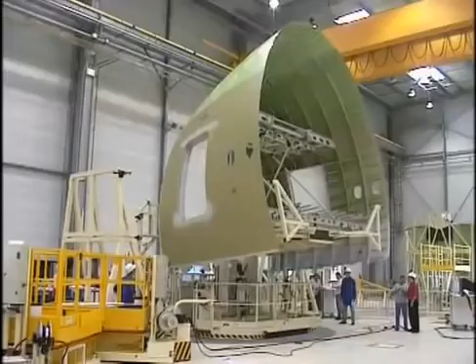The freighter version, the A380F, will carry a payload of 150 tonnes, 330,000 pounds, over 10,400 kilometres, 5,600 nautical miles. In true Airbus fashion, stretched, shorter and extended range variants of the baseline version will become available as and when the market requires them.

The A380 is powered by 4 Rolls-Royce Trent 900 engines, or 4 GP7200 engines from the Engine Alliance, a General Electric and Pratt & Whitney joint venture, delivering a thrust of up to 81,500 pounds, 37 tonnes each. To date, 6 A380 customers have selected the Engine Alliance GP7200 engine, for a total of 82 firm aircraft orders. The aircraft has a maximum takeoff weight of 560 tonnes, a maximum landing weight of 386 tonnes, and a maximum fuel capacity of 310,000 litres.

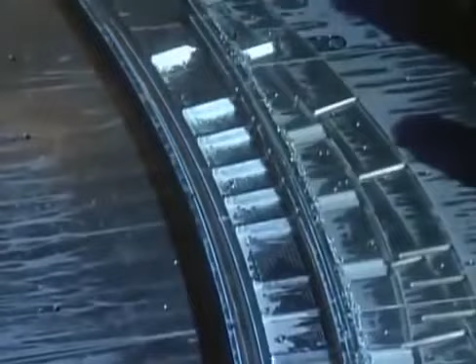Building on the success of its previous composite experience, some 25% of the aircraft is made from composites, 22% carbon fibre reinforced plastic, and 3% GLARE, a fibre metal laminate. And for the first time, not only are more primary structures made of composites than ever before, the centre wing box and rear fuselage are too.

The growing number of pilots already qualified on Airbus fly-by-wire aircraft will feel right at home in the A380 flight deck, as it uses the same cockpit philosophy and operating procedures as the A320 and A330/A340 families, whilst also benefiting from advances in technology for displays, flight management systems and navigation.

The A380 cockpit has 8 identical large interactive displays on the main instrument panel, with cursor control provided through a trackball. The displays provide a much larger screen area with clearer presentations, and they are augmented by a HUD, or head-up display, that increases pilot situational awareness, particularly during the approach and landing phases.

One of the new innovations introduced by Airbus on this model is the brake-to-vacate system, designed by a multinational Airbus team. It will help ease airport congestion and reduce the amount of time an aircraft remains on the runway. This enables pilots to select a runway exit while the aircraft is making its landing approach. This allows the aircraft to reach a specified exit at the correct speed under optimum conditions.

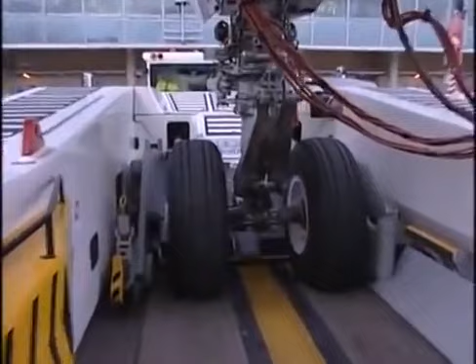Another design innovation, using a 5,000 psi hydraulic system, means smaller, lighter pipes and electro-hydrostatic actuators, which ensure that the aircraft can fly and land in the event of a total hydraulic failure. Not only was this aircraft an avionic leap forward for the company, its production process also resulted in change.

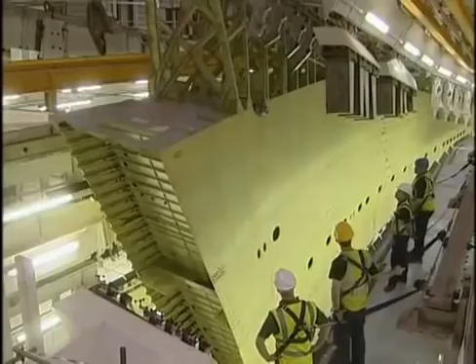The Airbus consortium had grown enormously, and in order to streamline decision-making and information flow even further, was restructured in January 2001 into a fully integrated company. French, German and Spanish interests were merged into the European Aeronautic Defence and Space Company, accounting for 80% of shares, while the successor to British Aerospace, BAE Systems, took the other 20%. Construction of new buildings in Hamburg, Bristol and Toulouse went ahead at breakneck speed.

Just over a year later, the French Prime Minister Jean-Pierre Raffarin formally opened the A380 assembly facility in Toulouse. Measuring 500 metres by 250, with a height of 47 metres, this massive new facility became the final assembly hall and static test site for the Airbus A380. It was here in January 2005 that the most advanced passenger aircraft ever conceived was put into final production.

Four months later, on April the 27th, the first A380 took to the skies, bearing the registration F-WWOW, and completed a test flight of 3 hours and 54 minutes. The truly international flight team were delighted with the results, and the full potential of the machine was beginning to be realized. A new dawn in aviation history was breaking.

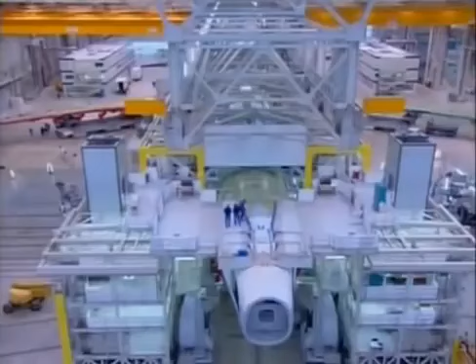Production of the new A380 got into full swing, but as usual, Airbus did not have it all its own way. Across the Atlantic, their arch rival in the long-haul market began previewing its latest model, the Boeing 787. In a complete reversal of the much earlier philosophies, Boeing elected to build their new aircraft not bigger, but faster, and able to access more airport hubs worldwide.

In Seattle, home to American aircraft building, they're about to start work on up to 3,500 of the new 787 Dreamliners. This is a mock-up revealing for the first time what it will be like inside, with new visual displays and passenger comfort. It will even have a new system that stops turbulence. Inside the new 787, it's radically different. As a passenger, I think one of the first things you'll notice is space. It feels much bigger. The windows are also larger by some 65% compared with most other planes.

And in terms of the environment, it burns 20% less fuel and there are fewer emissions. And that's crucially important for the aviation industry. Another innovation is mood lighting that can replicate day or night. Because we have LED lighting throughout, the cabin attendants can control all of the lighting with one button and bring it down to what we call a night environment, as you'll see here. And because we have electronic window shades, they can also dim all of the windows. And then prior to arrival, bring all of the lighting back up and open all the window shades.

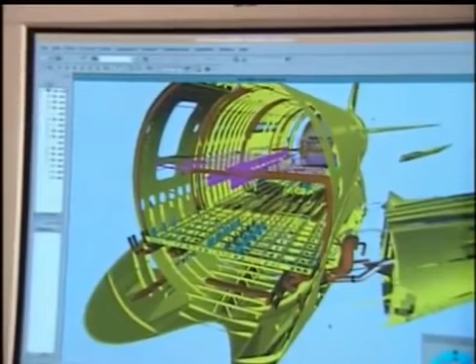We're going to face further significant delays on the 380. On the other hand, Christian Streiff, our still new Airbus CEO, and his team have elaborated already a very comprehensive program for improvement in terms of cash, in terms of EBIT and cost cutting, and obviously improving also in terms of processes. It would be a very significant event for us to cancel those orders. But, you know, we have to review all our options at this point in time.

With such a huge technical undertaking, breaking so much new ground in so many areas, perhaps setbacks of some kind are inevitable. But coming this far into the delivery schedule, airlines have to look at their own projections and make their own judgments on what to buy and when. As share prices on the recently reorganized EADS Corporation plummet and competitors begin to steal promised orders, things look difficult for Airbus. The company that was once the underdog of the aircraft manufacturing world, yet produced a litany of successful and technologically innovative aircraft, culminating in the largest passenger jet ever, could be facing its biggest challenge yet.